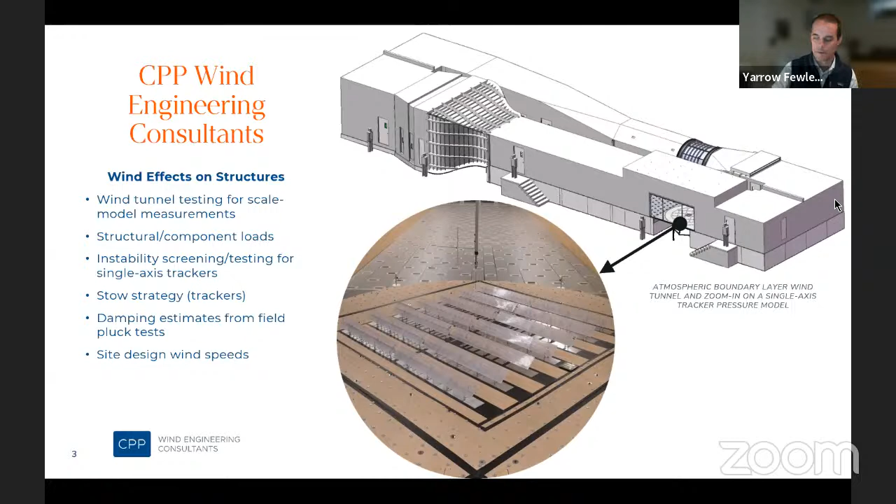But now that same tool is being used for the testing and design component of all manner of solar racking. There's other parts of our business that are related to solar that are outside the wind tunnel, such as estimating damping or helping clients estimate damping, or coming up with site design wind speeds when the wind map isn't good enough. I'm going to touch on some of that in more detail.

So let's start with a general summary of the challenge of designing for wind. It's kind of three parts. One of them is specific to single axis trackers, but everything needs to get the first part right, which is the wind excitation - what does the wind do to the structure. And did your wind engineer, your expert on wind loading, use an appropriate state-of-the-art technique to simulate the model in the flow simulation and in the analysis as well, so that you can trust that the loads coming out are correct? There are standards for this, so I'm not going to talk a lot about how to do that correctly.

The next step would be - all of these structures vibrate in the wind. All these solar racks, ground mount, whether they're fixed tilt or trackers, they vibrate in the wind. And to predict how it's going to vibrate, you need a finite element model. If you have that, that's step one. You need to make an estimate of what the damping is going to be on the system. Before you have a prototype in the ground, both of those things are sort of best guess. But really, it would be good to get a prototype in the ground so you can benchmark your finite element model and actually measure damping on the system. Then you have these with some accuracy, and with all of that, then we can predict what the dynamic response of the structure would be to that wind excitation.

And then the last one, as I mentioned, is for single axis trackers - is the system going to stay stable at the design wind speed? Because it doesn't matter if you put all your effort into accurately accounting for the wind excitation and how the structure vibrates to get the dynamic response - if you haven't designed it for stability, you will be surprised to see a single axis tracker can go unstable at a very modest wind speed, well below the design wind speed. And so with those 3 points, I'm going to go into a little more detail.

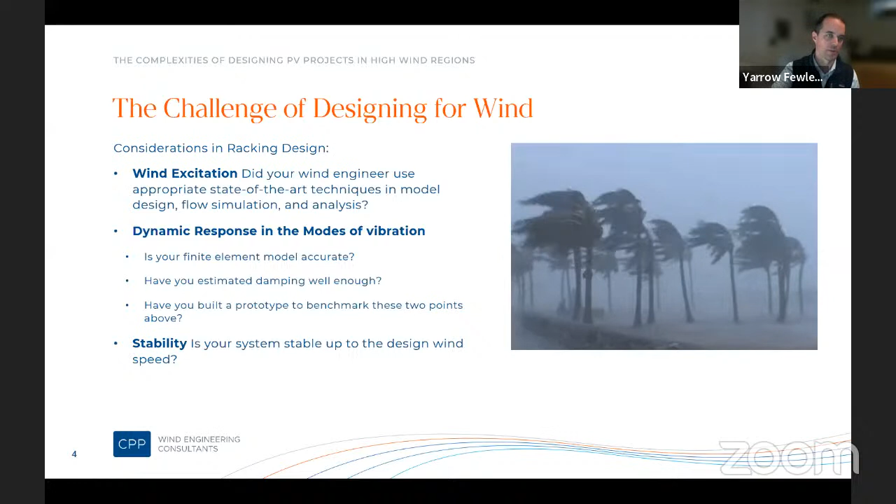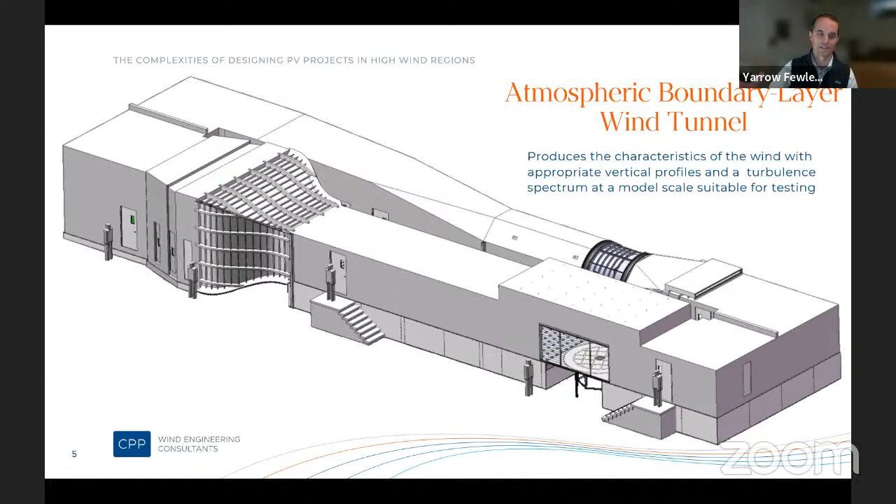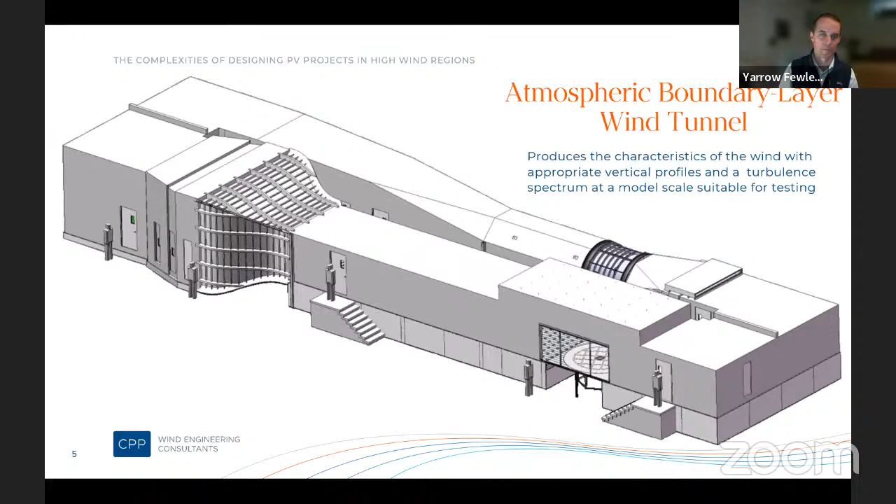First, I'm going to talk about the wind tunnel briefly, so it's understood what kind of tool we're using here. I call it a wind tunnel, and it is truly a wind tunnel. An aerospace wind tunnel, where you'd see airplanes tested, isn't actually a wind tunnel - they're simulating an object moving through still air, so they have different criteria than we do. We're actually simulating the wind, at small scale in this case. Our goal is to get the appropriate turbulence characteristics modeled in the flow inside this wind tunnel, at a scale appropriate for testing some structure.

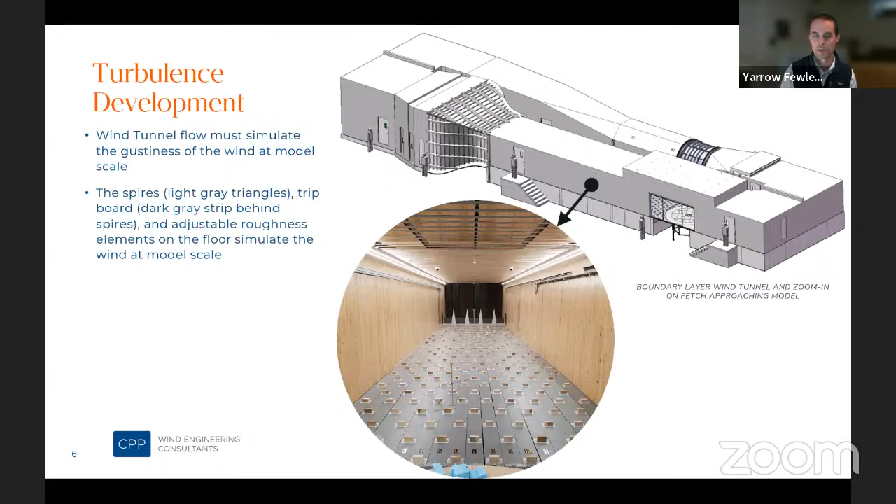This is inside the wind tunnel. The photo here is looking upstream - if you can see my cursor, the circle right here through the window would be where the test model goes. Looking upstream from that, you see this fetch: the floor is covered in block elements, with more elements on the upstream end. With flow coming toward you, the viewer, it passes over all these objects and generates turbulence of different scales, which combine. By the time you get to the edge of the turntable, you've developed the right turbulence characteristics for the scale you want to test at. This is a critical parameter - it's the type of tunnel used for wind loads, because if you don't have the turbulence right, if you don't have the gustiness right, the loads can't be trusted. They have no basis.

Taking a step back with this photo, moving back just slightly, now you can see the test model in that same general section. This is a model of a single axis tracker. It's a pressure model, and I'm going to talk in detail about that. It's mounted on a turntable that's just like a record player, only it spins very slowly, so you can turn the model to simulate the wind at increments suitable for capturing all the variation of loads with wind direction. A model like this had around 800 pressure measurement locations on the upper and lower surfaces of the PV modules. From that, we can do an immense amount of analysis - immensely flexible, I should say - to come up with a suitable number of load cases for the designers to use. The instrumentation, the pressure measurement hardware, is all mounted under the floor of the tunnel, so you don't see it here - it's all hidden from the wind.

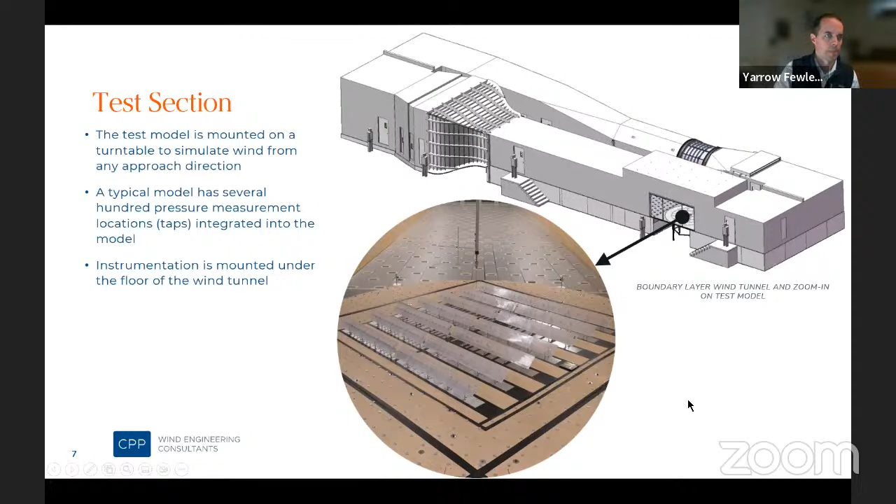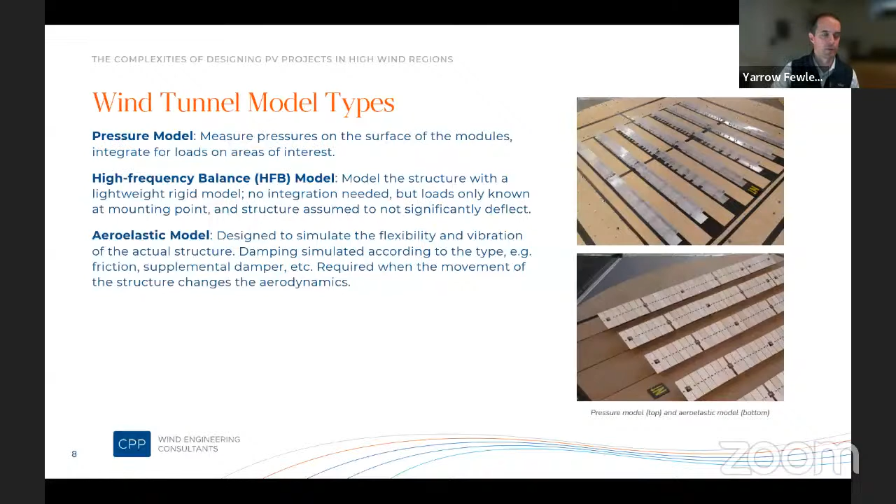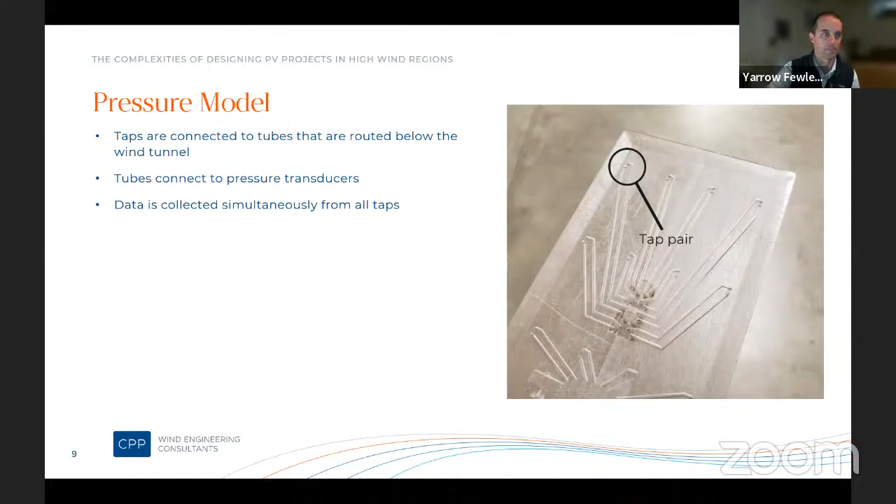We generally collect data in 10-degree increments, and depending on system requirements, you look at different tilts, heights, and GCR, depending on how much those parameters vary. Combining all of that - all wind directions, heights, tilts, and GCRs - you can end up with over 100 billion data points just as raw data. It's a mountain of data, and the analysis is really where the fun starts in coming up with useful load cases.

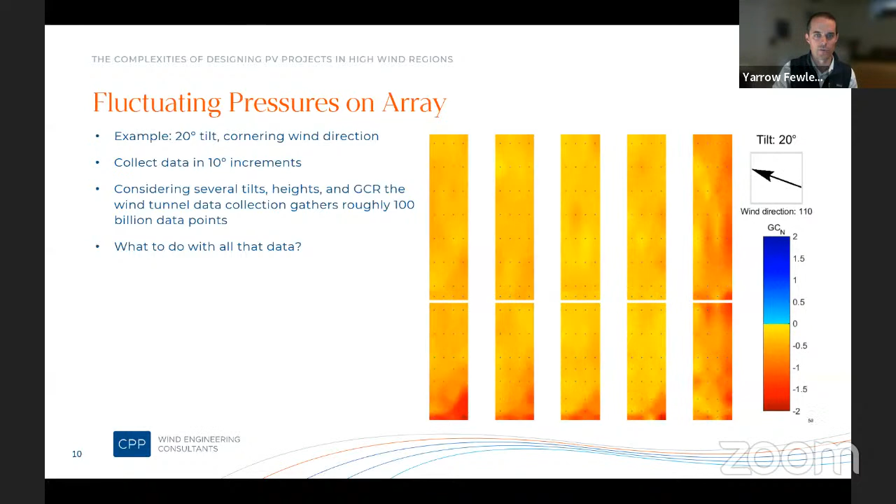That cornering effect is due to a phenomenon known as a corner vortex. In a cornering case, you end up with two of these vortices that look like little tornadoes laid flat against the modules, with the long axis parallel to the modules. They create tremendous suction right on the module surface, forming right at the corner, and they die off reasonably fast - intense, but short-lived.

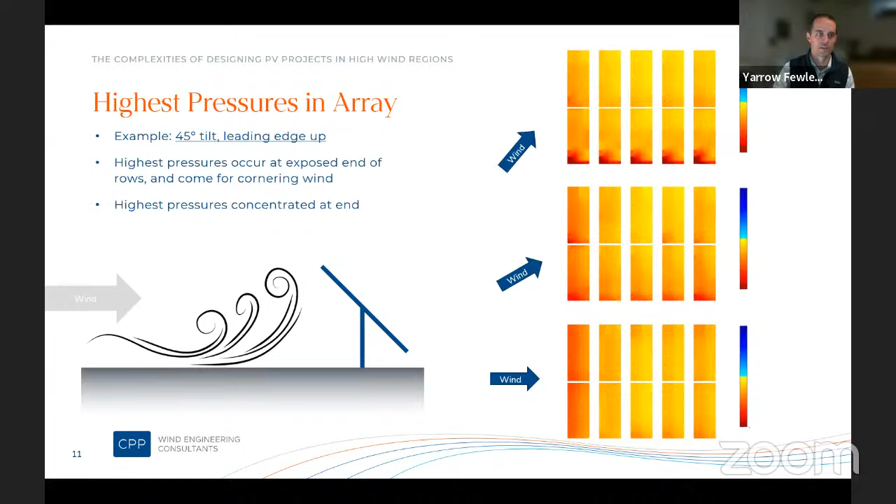In the bottom plot, you can see what the wind looks like coming straight in. The edge effect and cornering vortices have all but gone away, and you have a more even pressure along the whole row, which is also less severe - not as severe a load in that case. That type of high suction is due to flow separation off the sharp edges of the modules.

We take all that data and slice it up into smaller areas. For this load case, we might be interested in the peak load on a module, for design of the module itself, or for design of the module mounting to the torque tube or racking, depending on the system. Going through the full time history of configurations and wind directions, we arrive at the load case that maximizes the peak load on the module.

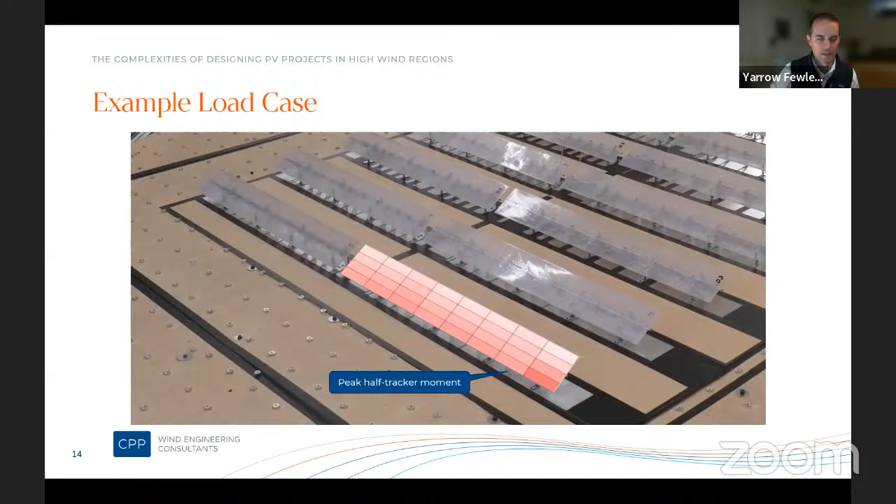It's not as intense. We can extend that even further for a single axis tracker, and you can see this time quite a stark drop in the sharpness or brightness of the colors. There's still a little hot spot near the corner, indicating there's some sort of vortex forming along here. But by and large, this half tracker area - in this case we're looking at a half tracker moment - so maybe this informs the design of the torque tube or design of connection to the drive system or something.

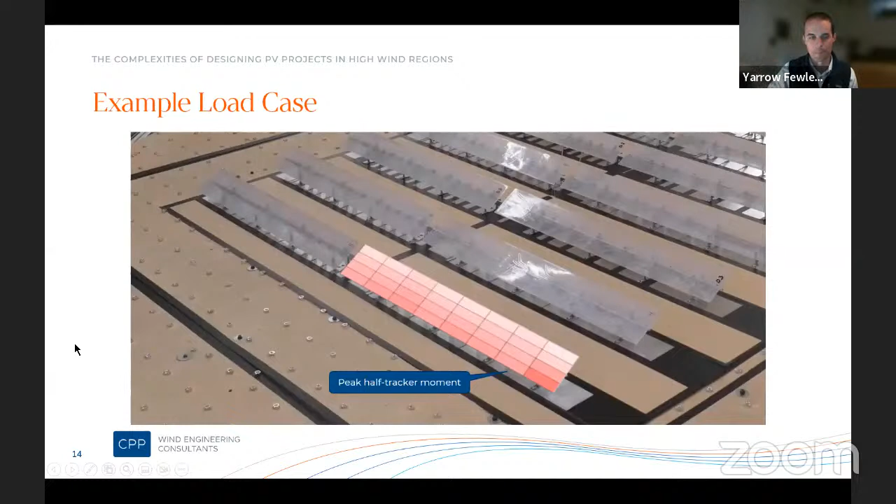At this particular moment, when moment was maximized, it's probably a different direction. It's certainly not as intense at the corner. It's really the one that makes that biggest asymmetric load that would be of concern for the design of those torque tube type components.

So then we've captured all this data from the wind tunnel - that is, a nominally rigid model in the wind tunnel. This is the excitation, as I'll call it, which is what does the wind do to the structure? So the question then becomes, how does the structure respond? Does the structure vibrate in a way that is meaningful?

I'm sorry about all the text on here, I'll try and talk you through it. So every structure vibrates at some frequency. If it's high enough, you don't necessarily need to worry about it in terms of amplifying your loads. But if it's at a low enough frequency, the excitation from the wind can be amplified by that vibration, and that energy gets fed into the system at the natural frequency of the system, and can actually increase the loads based on the inertia of the system vibrating in the wind.

So I want to talk a bit about the wind turbulence spectrum and how that lines up with the structure. Ultimately, you have this broad spectrum of energy in the wind. You have the effect of the rack itself, perhaps shedding vortices, which is a very interesting phenomenon I'm going to show a little bit more of. And then how does that turbulence spectrum with that vortex shedding energy combine or overlay with the natural frequency and the tendency to want to vibrate of the structure at its natural frequency?

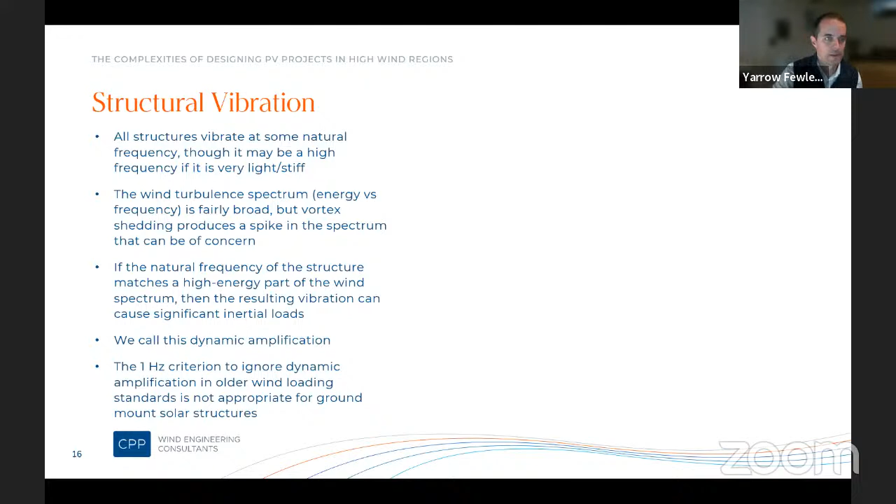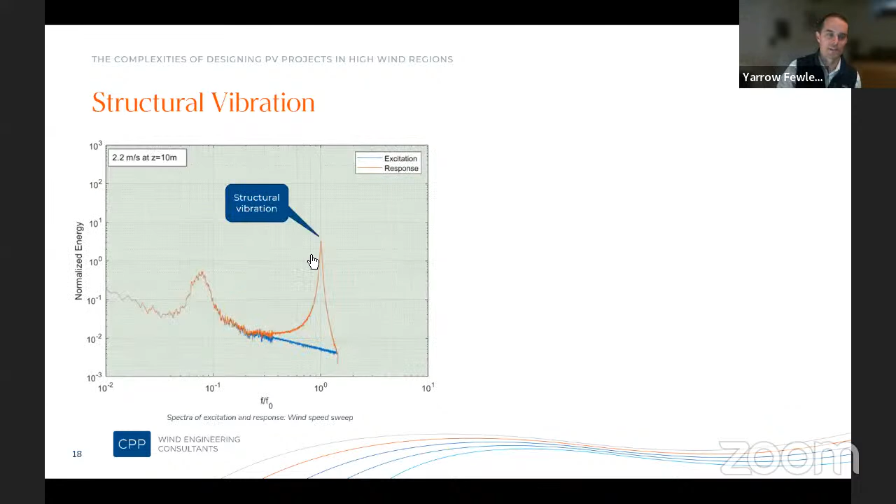The next slide, I'm just going to take that same example, and it's going to be a video that shows how the wind spectrum slides over as the wind speed comes up.

So at the top, a design level of event, a pretty significant design level event. As the wind speed goes up, that wind spectrum slides over, and that vortex shedding eventually matches the frequency of vibration. At that point in time, if you follow the logarithmic scale on the left, that spike is almost 3 orders of magnitude higher, 1,000 times higher than anywhere else in the spectrum.

So this is when you get significant dynamic amplification. Again, it's a narrow spike with respect to the whole spectrum, but the amount of energy in that narrow spike is really significant. This is a really fascinating concept—I hope you get the fundamental of this part of it. I know the spectra are a little bit hard to digest.

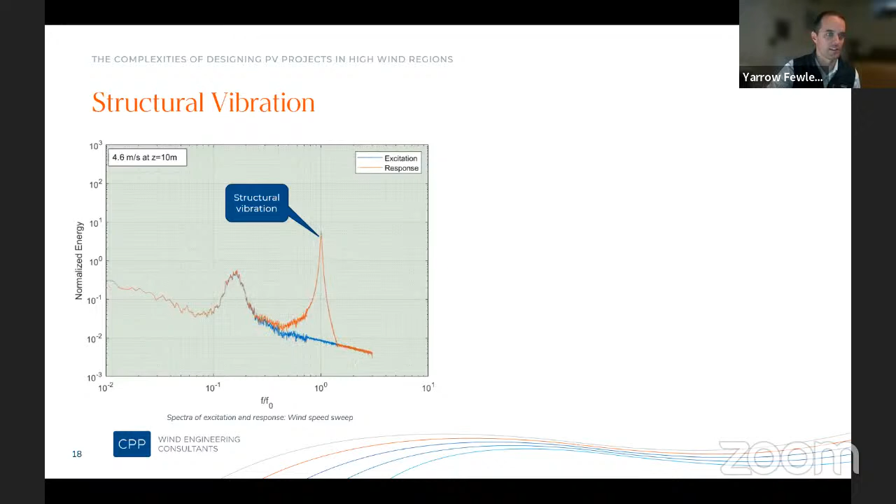The next thing I'm going to talk about after dynamic response is stability. This has to do with single axis trackers, because most of the other types of racking systems don't have the flexibility that a single axis tracker can have.

Go back 7 to 9 years, and single axis trackers were this novel way to get more energy, but nobody had really built a lot of them in the field, so people hadn't experienced how much the systems could flex. As they got built, people started to recognize that these were deflecting a lot in the field. When I say deflecting, I mean torsionally—they're twisting about their length.

You have a long wing and a long torque tube with modules mounted to it, and if you do all the static and dynamic calculations right, you still end up with a lot of twist at the end of this long row. What ended up happening was a phenomenon that resembled some phenomena seen before in bridges. In other industries it would have been called flutter or galloping, but it didn't behave quite the same—it's a new phenomenon, a new instability called cyclical torsional divergence.

I think it'll be easily understood from some of the videos I have here, but I want it understood that it happens at low tilt. This is the first of 2 instabilities, and this one happens at low tilt.

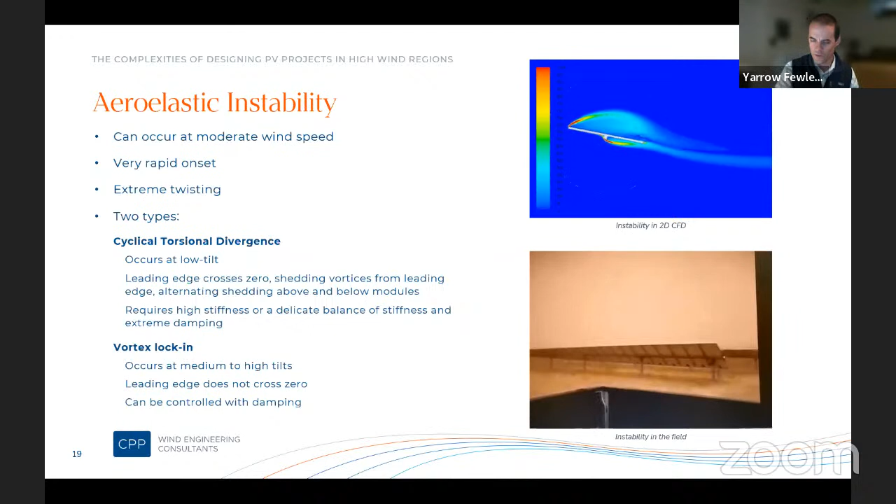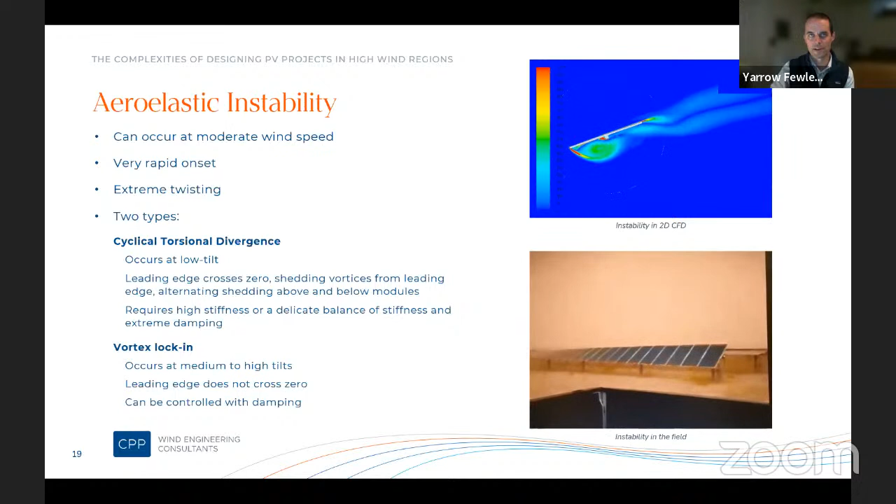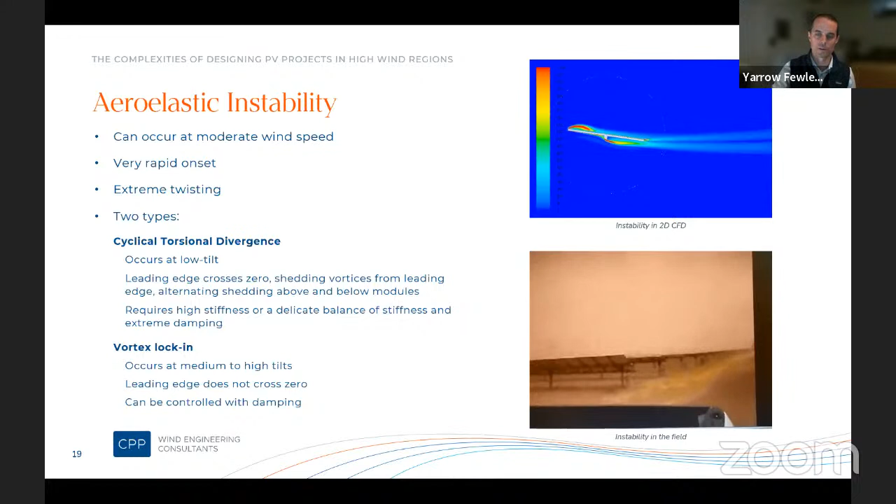The other phenomenon is the vortex lock-in. That term has been used in other industries before to convey a vortex shedding phenomenon, where vortices are shed from alternate sides of a structure, in this case the leading and trailing edge. It happens when the tilt is not near zero for solar structures, 20 to 30 degrees tends to shed vortices pretty strongly. This one is not as much stiffness driven, it's a lock-in of the natural frequency with the shedding frequency, but it's more controllable by damping. You can control it more easily with a decent level of damping.

Just one last topic on the testing side is the aeroelastic model I touched on. This is where you simulate the mass, stiffness, and damping all at model scale, so you can recreate the behavior in the wind tunnel that you'd expect in the field. This is the most sophisticated type of wind tunnel model for structures right now. The primary interest for solar is the torsional mode, so we spend the most time trying to model that torsional mode of vibration. You can also model the heaving modes of vibration if that's of concern. You can get quite a lot from this model, but fundamentally it came about to try and characterize that instability phenomenon and find ways to get past it, so you could have a system that stayed stable up to the design level.

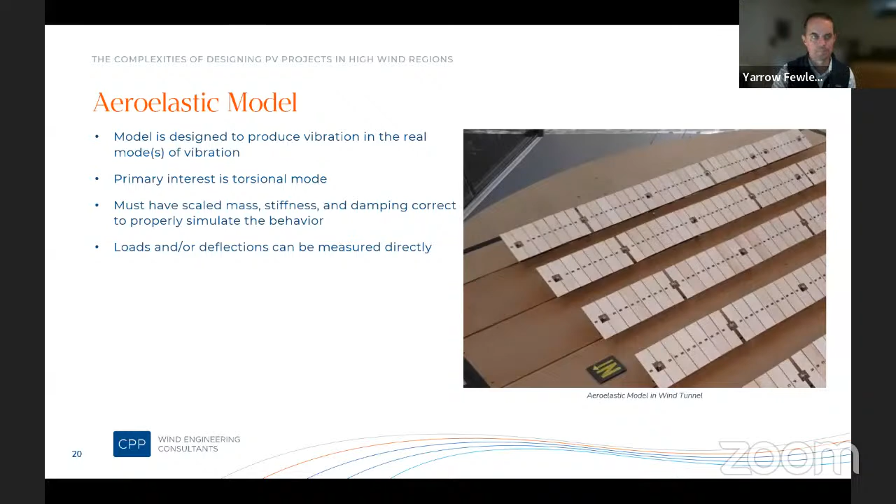One last slide on the effect of large format modules. I don't know if Scott will cover this in more detail, but there are a couple notes I'd like to make. For loads, it's fairly simple: you go to a larger module, you increase the area, loads go up with area. Moments also go up with area, but if you're making the chord length of the system bigger, you're also increasing the moment arm, so moments go up by a greater proportion. So a 20% increase in module area would be a 20% increase in loads, but a 44% increase in moments. There are other smaller parameters like post spacing that might get altered as you go to a larger module, which can affect the coefficients.

If you make your posts closer together, you can increase the correlation and increase the coefficients a bit as well. So there can be a bit of a double whammy there.

On the dynamic response side of things, the damping ratio is reduced because the critical damping gets increased due to the increase in mass and stiffness required for these bigger modules. And when damping ratio goes down, the dynamic response tends to go up. In that slide I showed with the orange spike in the spectrum, that orange spike will get worse for a lower level of damping.

It'll actually get taller, higher up in the spectrum, higher up in energy. The dynamic amplification factor can improve slightly. If the mass and the stiffness both increase, the natural frequency stays about the same, but the bigger chord means it sheds the vortices at a lower frequency. So you actually have to have a slightly higher wind speed to get that to line up. That can be a slight improvement - not offsetting, but a slight improvement.

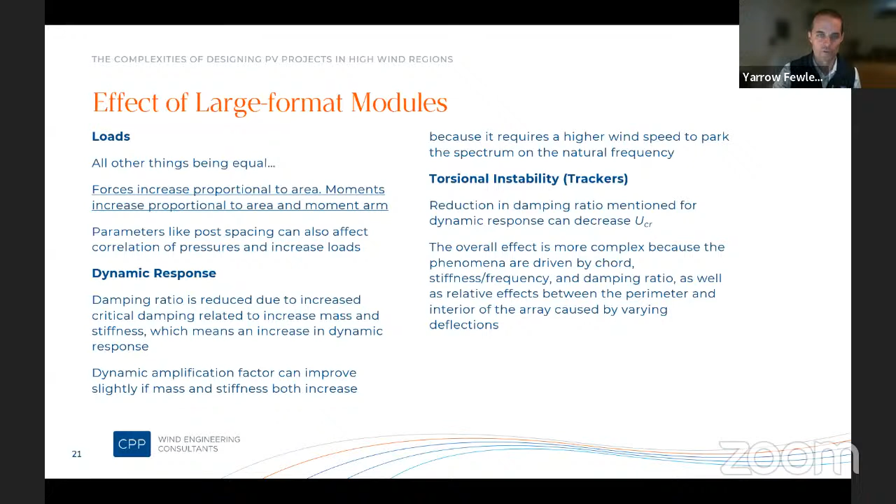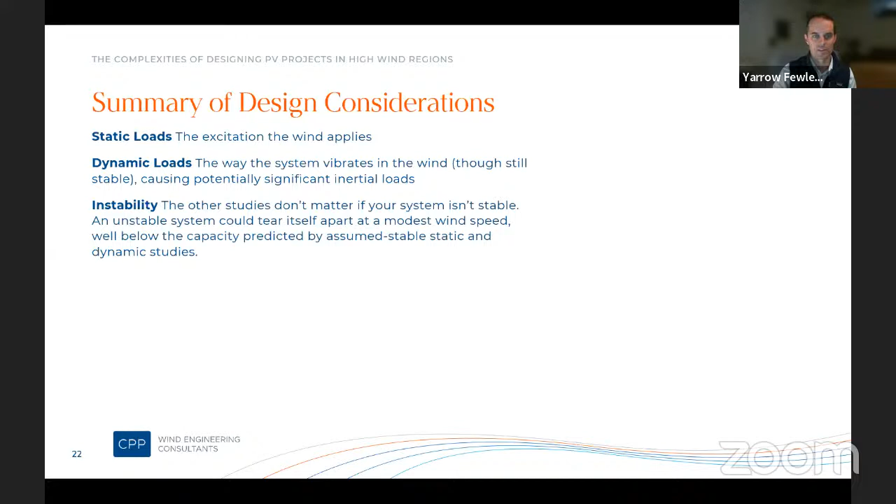So just summarizing here, last slide, the three concepts for the challenges related to wind design: maybe the static loads, that's the excitation that the wind applies. The dynamic loads is an analysis component, usually of that excitation, that tells you how the system vibrates in the wind. And both of those are assuming that the system remains stable. Then the last one is the instability, which I've just gone through in depth there, but the other studies don't really matter if your system doesn't stay stable. So it's a really critical thing to get right, so the system actually makes it to that design level intact.

And I think with that, I'll hand it over to Scott.

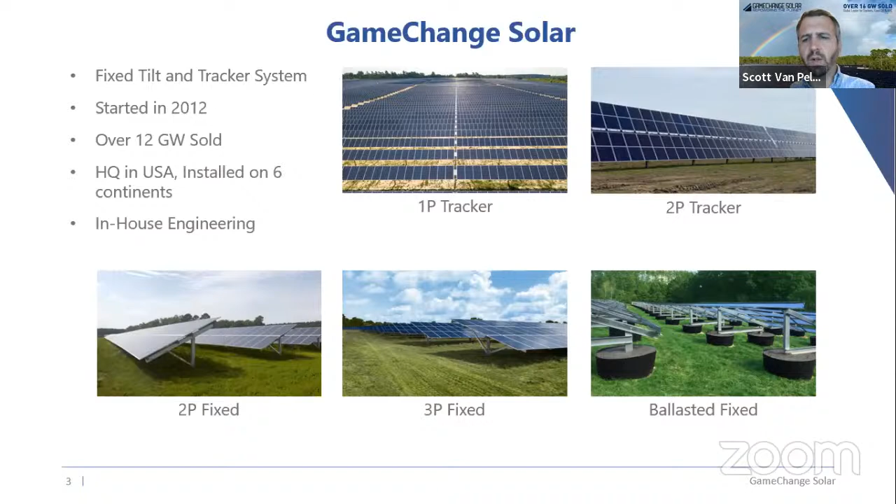So I'm going to divide my presentation into two segments. I'll talk a bit and build on what Yarrow was discussing in terms of our concerns, then there'll be a somewhat lengthy discussion on how we take wind speed and convert it into forces and pressures on the components in the structure. I saw from the chat there are a couple structural engineers on the line, so hopefully that's not too dull - hopefully it's well understood. Then we're going to talk about some of the different solutions we have - what are the levers we have to pull when designing a fixed tilt or tracker structure to accommodate higher wind speeds and pressures.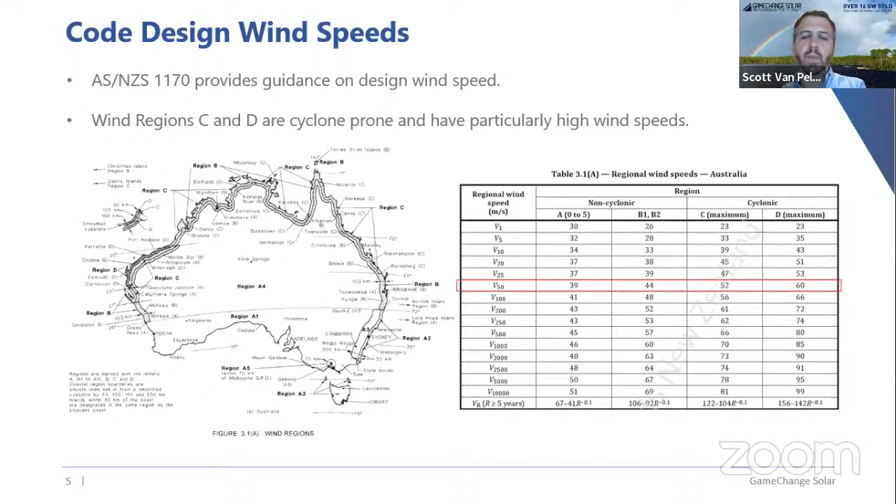I've highlighted that row for V50 - typically, tracker structures are designed to a 50-year return interval in Australia. For the structural engineers on the line, that's table 3.1 of 1170, for an importance category 1 structure. You can see as you move from the non-cyclone prone regions A and B to the cyclone-prone regions C and D, there's a dramatic increase in wind speed. These are areas where special requirements may be imposed on the tracking vendor to accommodate those higher wind speeds and pressures.

I want to take a couple minutes to talk through the relationship between wind speed and force or pressure on the racking structure. This is the appropriate formula - equation 2.5 out of AS 1170. Breaking it down, the first clause is straight from the drag equation in aerodynamics - one half the density there. The next clause is wind speed, and you'll see that's squared. So the forces and pressures on the racking structure are particularly sensitive to wind speed. Probably isn't a surprise, but it's useful to keep in mind that it's a squared function, not proportional.

So racking structures being designed in wind regions C and D are seeing dramatically higher wind pressures than those in the interior of the country. Continuing through the formula, what's most interesting to us as designers of a racking structure is the shape factor - using American parlance, it's called the gust coefficient. This is what actually accounts for the geometry of the structure. Not surprisingly, a Lamborghini is a lot more aerodynamic than a billboard - this is the part of the equation that accounts for that.

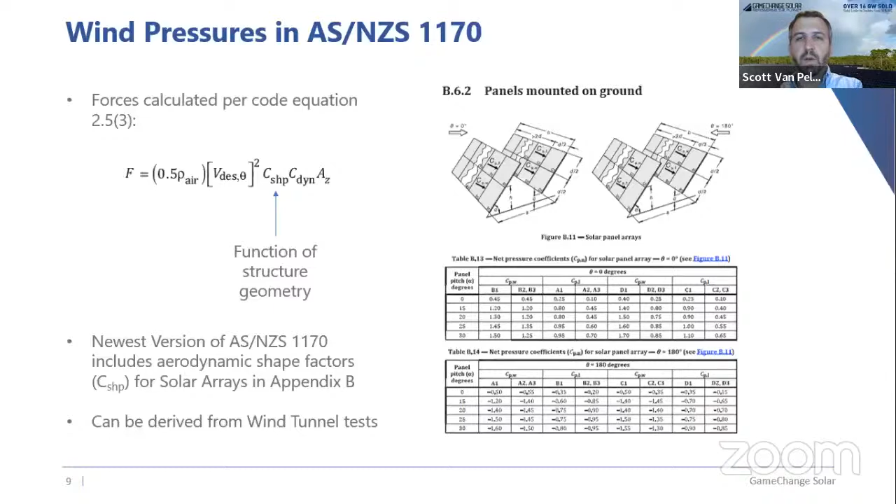So this is one of the big ways we see to bring wind pressures or wind speeds down - using actual wind tunnel testing to derive these shape factors. That's kind of what Yarrow talked through already, but again, great to see it's in the code, and this is the direction standards committees in Australia are moving. I'll touch on this briefly - Yarrow went into good detail about the wind tunnel itself. Section 1.1 of 1170 does make reference to use of wind tunnels for determining shape factors. Simply put, by using models in the wind tunnel specific to the Nextracker, GameChange tracker, ATI, or any tracker system, you're going to get more specific, more accurate, and less overly conservative shape factors. That's going to make the design more economical and more practical for a high wind zone.

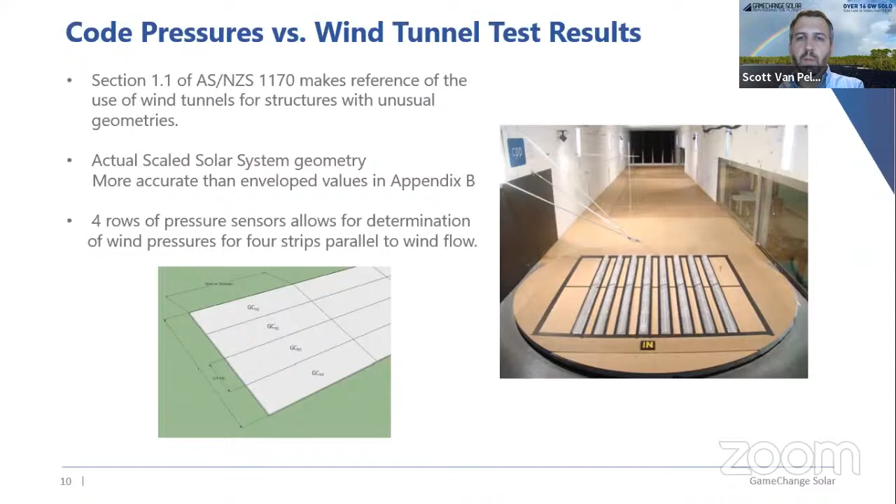I'm just rounding out this equation. So the next factor is for the dynamic amplification, which Yarrow touched on already.

And lastly, area. I bring this up because currently there's a move within solar panel manufacturers toward a larger form factor. These modules are typically about 1.3 meters wide. As you go from a conventional shape module to a large format module, you're increasing the area, so you're going to have more forces on your bolts and more forces on your mounting rails.

So it's just something to keep in mind if you're a developer sourcing modules for a project, if you're in a cyclone-prone location, can the mounting structure accommodate that larger force?

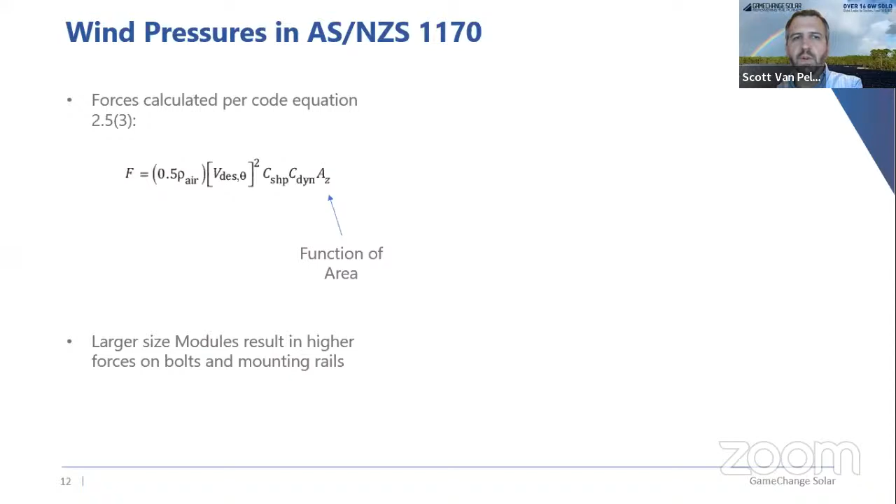All right, so to round out the concerns part of my presentation, this dovetails with what Yarrow was talking about. This is the aeroelastic testing.

I'd like you to keep watch of the table there on the left. The wind is coming from left to right in this image. On the left side is the leading table, and momentarily you'll see the table lose aeroelastic stability. As you can see now, this wild back and forth motion - I think Yarrow showed an image from the field, but we do actually see this in the field.

Recently we had an installer forget to couple one of the tube segments together to the motor, and the system did go unstable in moderate winds. So this is not an exercise - we do see this in the field, as Yarrow's clients did in the older video that he showed.

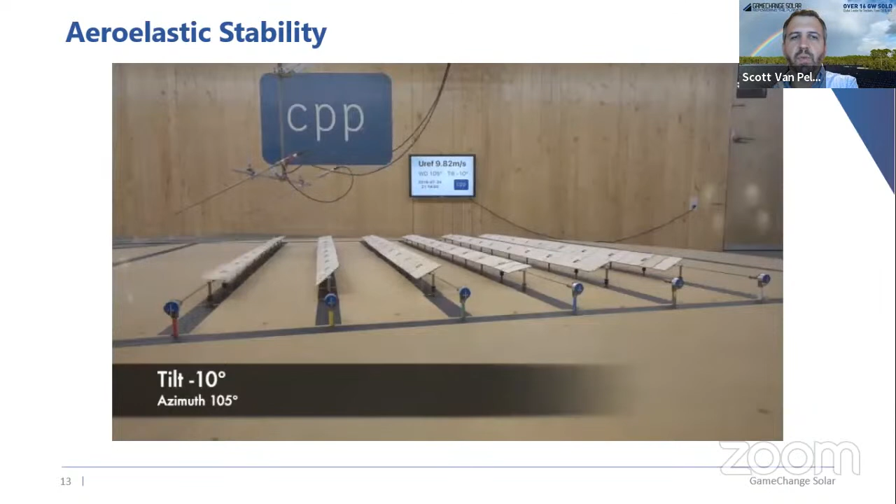These are kind of the things that we're looking at when we're designing a racking system in a higher wind speed environment: are we maintaining aeroelastic stability, and do we have enough capacity for the modules? Those are the things we're mostly looking at.

So starting to talk through, okay, how do we address this? What are the tools in our toolbox as designers to create an elegant, cost-effective design? The first decision is really, what tilt angle are we going to design the tracker for? When the tracker stows or goes into its defensive position, what is the tilt angle of that structure?

There are two different philosophies. There are trackers in the market that will stow flat. The advantage is there's less pressure on the face of the modules. The major detriment is that there's higher torque on the torque tube, and they are much more susceptible to aeroelastic instability - in other words, the wind speed required to get that dramatic back and forth motion is much lower.

Alternatively, you can stow at a relatively high tilt angle. This will result in higher pressures on the modules, but the trade-offs are lower torque on the tube and more aeroelastic stability.

Given, as Yarrow pointed out, the catastrophic and binary nature of aeroelastic stability, we typically find that that's going to govern. So GameChange's approach is to stow at a higher tilt angle and to accommodate those higher normal pressures accordingly.

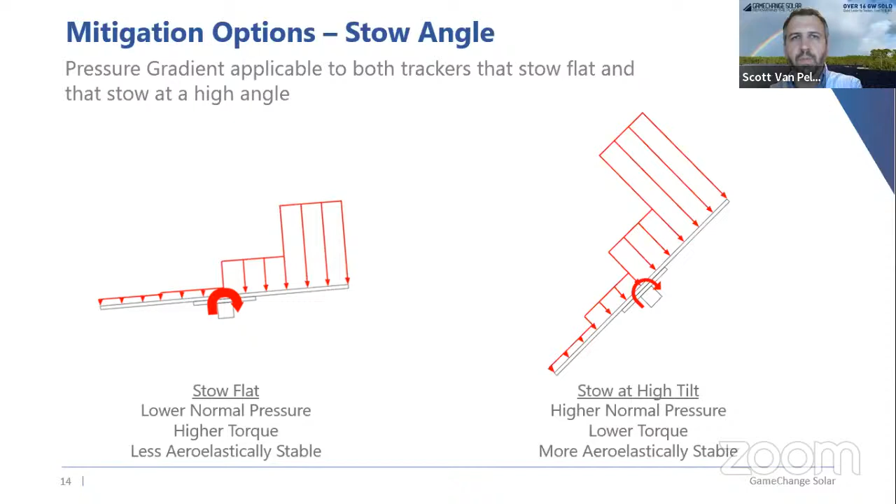So okay, we figured out our tilt angle. We're designing for aeroelastic stability, but we've got this high pressure on the modules. So how do we accommodate that?

Solar modules are typically designed for a mechanical capacity of 2,400 pascals, and recent changes to standards make it possible to be even less than that. Module vendor A can go to TUV or Intertek, or in the States UL, and get a test report or listing per the applicable standard, IEC 61215, for say 1,900 pascals or something less, and that may or may not be appropriate for a project in a cyclone-prone region.

So again, developers and EPCs, as you're selecting what module to use on your project, the mechanical capacity of the panel is something to keep in mind if you're designing in wind region C or D, something cyclone-prone. On the flip side, even though the module is rated for 2,400 pascals, that's not necessarily all the module can handle.

There are ways racking vendors can work with module manufacturers to increase that rating. Can the racking vendor provide longer mounting rails? Can we bolt to the module at 8 locations instead of 4? There are a couple of tools in the toolbox that can be used to increase that mechanical capacity to 3,000 or even 3,600 pascals, to the point where the mechanical capacity of the system is shown to be enough for that high wind event.

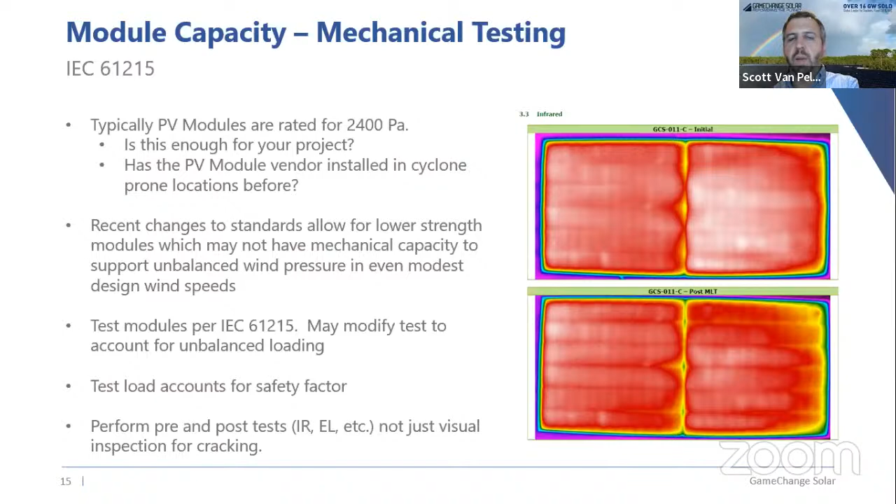Again, the testing is done per the IEC 61215 standard. It includes safety factors and a whole bunch of tests, not just visual inspection - did the panel crack - but also electroluminescent and infrared testing. There's an image there on the right of infrared testing to confirm that the panel is not damaged electrically, in addition to not being damaged structurally due to that high wind pressure.

So to continue to flesh this out, the capacity of that system, it really is a system, it's an assembly. It's both the PV module and the mounting rail. Higher mechanical ratings can be achieved by using longer rails, mounting at more locations.

For projects in the interior of the country, if you're down by Adelaide, you may be able to use a clamping system. Again, Game Change, ATI, Next Tracker, the typical tracker vendors all supply clamp type systems for mounting rail. More economical, quicker to install. Typically they don't have the mechanical capacity to be appropriate for a hurricane-prone or cyclone-prone region.

But typically you can provide enough rail, and stiff enough rail, to reach the mechanical capacity you need for those higher pressures, in particular if you're using more than 4 bolts per panel.

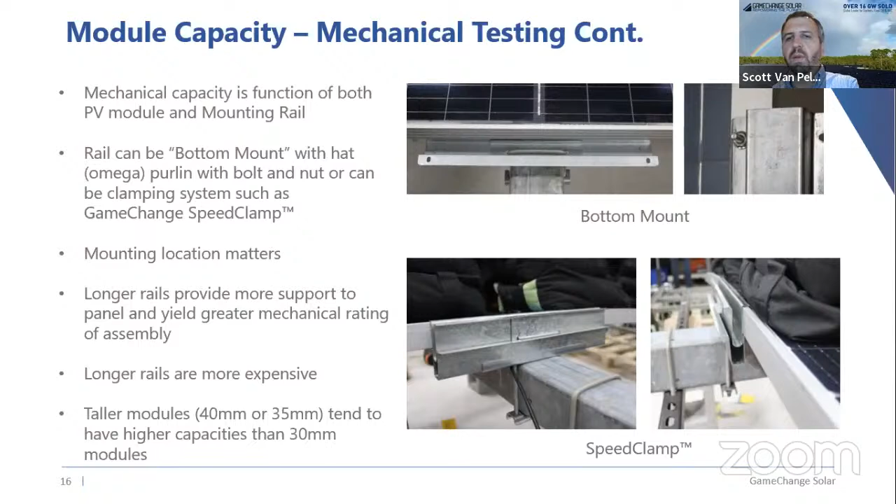Last note is to look at the height of the panel frame. The panel frame itself - there are module manufacturers coming out with module frames that are only 30 millimeters high. They tend not to be as strong as modules in 35 or 40 millimeter frames. Quick note on different module types.

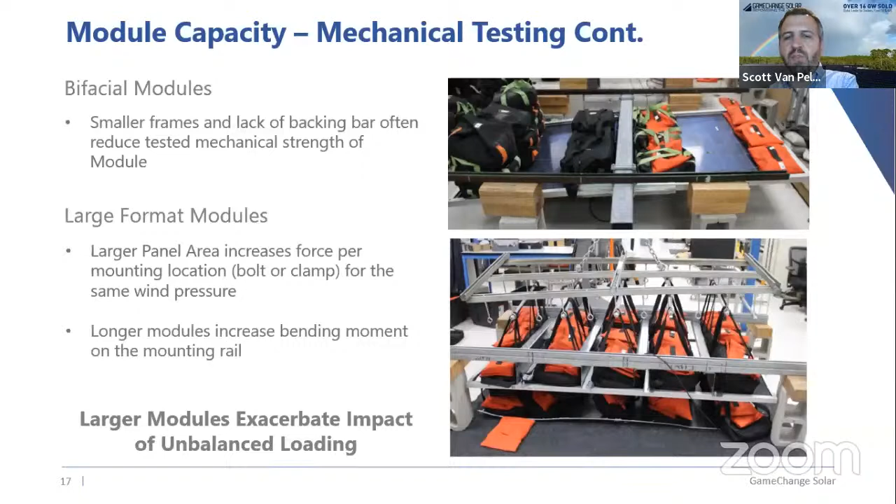Bifacial modules are pretty common at this point for utility scale systems. They do tend to be a little bit less strong than their monofacial counterparts due to the lack of a backing bar. And for the large format module, particularly these 1.3 meter wide modules, there are times where the glass itself cannot support the pressure required for a cyclone location. The image in the bottom right shows a case where the glass literally fell out of the panel frame, despite the fact that the panel was supported at 8 points. So selection of module when you're working in a cyclone-prone region is very important.

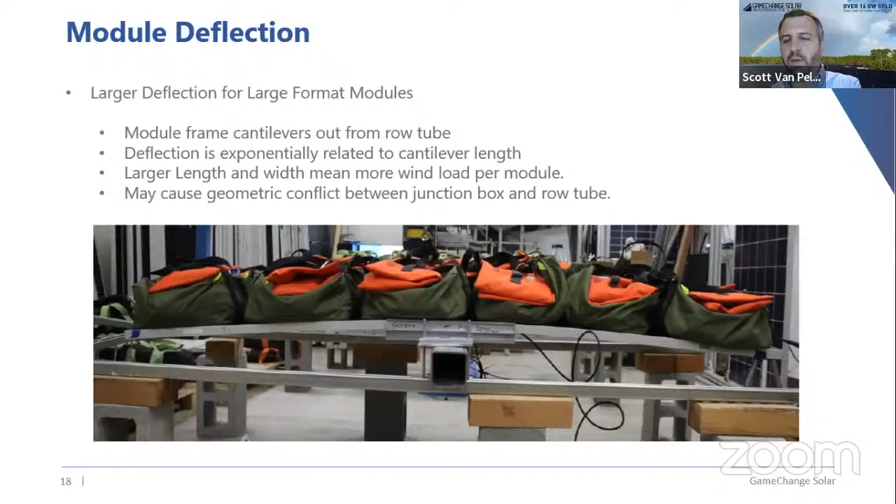One last note on module testing. One of the things that GameChange does track is deflection of the module itself. This is really relevant for the downforce case. There's not a ton of snowy locations in Australia, but for the work we do in Canada and Northern North America, the concern is that the junction box of the module will come down and kiss the row tube - a geometric conflict with the row tube under loading. That's one more thing to be aware of, and that the designer should be keeping track of.

So in terms of our mitigation options, this is one system that GameChange has, a tool in our toolbox called a porous panel. This is a patent pending system. The idea is to extend the row by adding a metal frame essentially - a metal plate that's reinforced, that's got holes punched in it. The goal here is twofold.

If you think back to some of the images Yarrow showed about the stress concentrations along the south edge of the array, that would be mirrored on the north edge. You've got the highest stress concentration, that very intense suction pressure, all the way along the edge of the array. So we provide a steel structure that occupies that space of high suction load. This porous panel system does twofold: one, it occupies that space, causing that intense vortex to apply load to steel instead of a glass module.

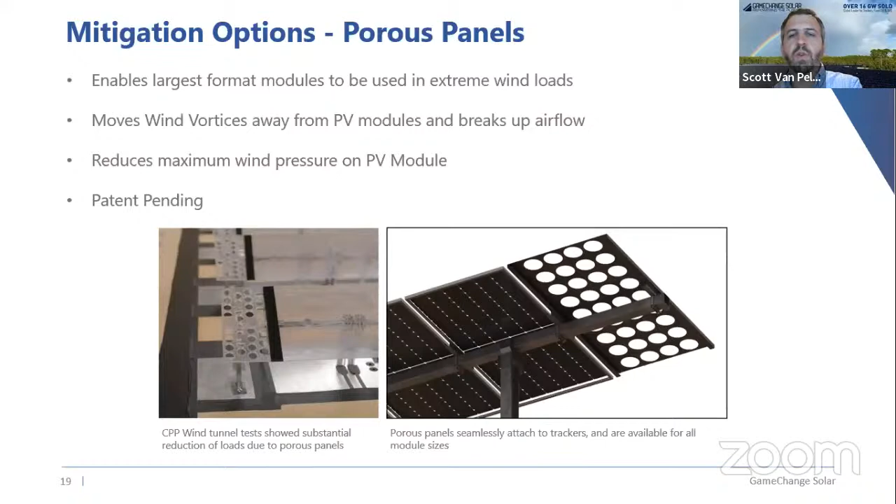And it is also porous, so it helps to break up the formation of that vortex. By using the system, as you work your way from the edge of the array inward and look at the pressure gradient, by the time you get to the first true PV module, the pressures are low enough to be accommodated by that module. This is a system we're using right now in South Florida in the US, obviously a hurricane-prone location, and that we're looking to use elsewhere as a way to reduce the maximum wind load on any given module.

In terms of the tracker or fixed tilt racking structure itself, I'll be honest, there's not as much sexy and exciting to talk about here, but I do want to touch on this. The row tube design, the post design, should be done in accordance with codes and standards. When we're in Australia, we're designing with 2159 for the posts, looking at 4100 or 4600 for hot rolled or cold form steel.

In terms of things to keep in mind, particularly with large format modules: the longer panels or longer chord length from large format modules mean more torque on the torque tube. They typically get more load at the top of each post. And something that may not be obvious, in terms of reveal height, how much the post sticks up above the ground, for the same clearance, the same distance from the bottom tip of the modules to the ground, and the same tilt angle, a larger format module is going to require more reveal height.

The torque tube is actually going to be higher off the ground, given the increased length of the module. And that has a couple of knock-on effects in terms of more steel for the posts, greater bending moment at the base of the post, so you may have to increase the kilograms of steel per meter, and you may have to increase embedment depth. So just some things to keep in mind when picking a module.

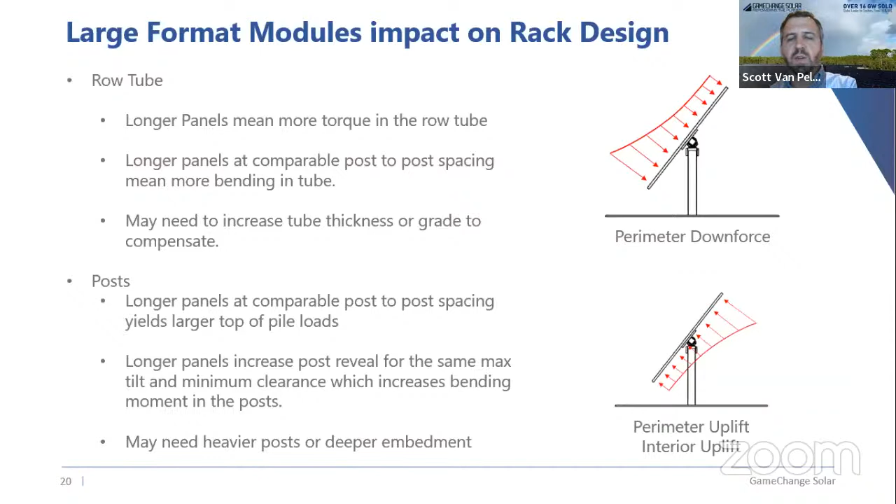One of the detriments - I know that module change midstream of a project is not uncommon right now, given the volatility of the PV module market globally. But designing for a larger module first, and then having to switch to a smaller module, is much easier than vice versa.

Lastly, Yarrow and I talked a lot about aeroelastic stability, but I wanted to touch on some of the tools that are available to address that failure mode.

In particular, in terms of damping stiffness, GameChange utilizes shock absorbers. They're springs with coaxial dampers, but the dampers are very, very stiff. We take a slightly different approach to our dampers than most of our competitors. Our dampers are in excess of the critical damping, the rotational critical damping of the tracker structure, and that's been verified through pluck tests or free vibration tests.

The point of that is that during that design wind event, during that wind gust, the damper will not move. It will act as a strut. So again, we're taking a different approach than conventional harmonic design. We're not using the damper in terms of trying to move counter to the excitation of the structure and pull energy out of the system.

If you're trying to use a viscous fluid damper to pull energy out of your tracker through a multi-hour hurricane, it's not going to work, right? The viscous fluid is going to heat up, it's going to lose its damping, it's going to fail.

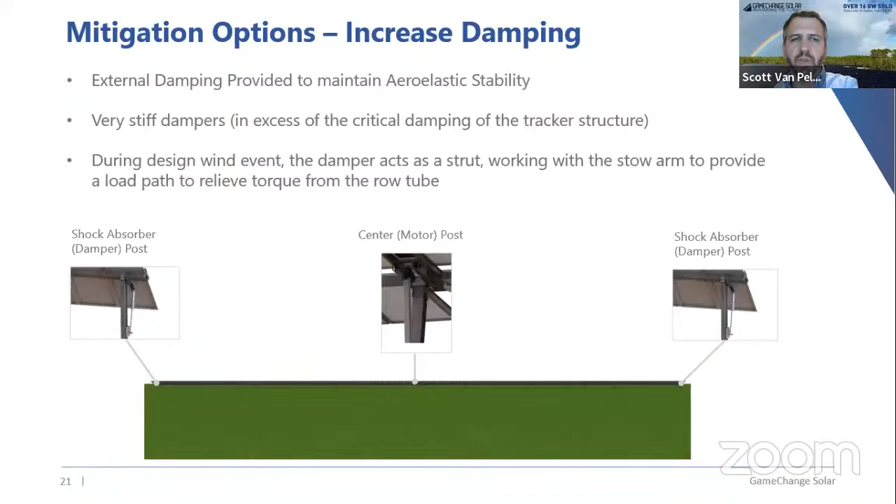So with that, I'll pause there. Thank you, everyone, for your attention, and I look forward to the conversation continuing with some questions.

Thank you very much, Scott. I have heard a lot of presentations on this topic, mostly in Spanish, I have to say, so I learned a lot of vocabulary today. But I really, really liked your porous panels idea. I think it seems simple, but such a great solution, and there are questions on it. So I'm really looking forward to hearing more about it. Genuinely, really, really cool to see.